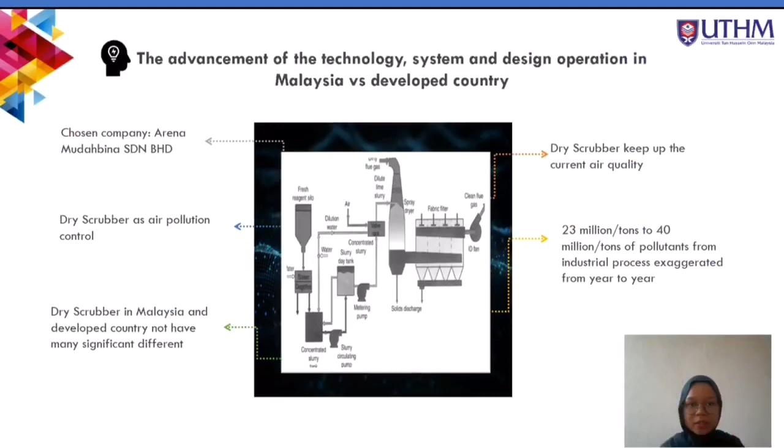A bit about the advancement of the technology system and design operation in Malaysia versus developed countries.

Every country in this world faces pollution from the industrial sector. Malaysia has its own technology and system to manage industrial pollution, like Arena Mudahbina Sdn Bhd, a construction company we contacted to get details about industrial air pollution control. As we know, dry scrubber is a pollution control method used at the construction location for Arena Mudahbina and other companies in this country.

The advancement of the dry technology system and design operation in Malaysia compared with other developed countries such as Belgium does not show many significant differences.

On top of that, the technology and system engineers simply keep up the current air quality that can cut back air pollutants. From year to year, we can see that the emission of pollutants from industrial processes has increased from recording 23 million tons to 40 million tons. Even severe air pollution management is affected.

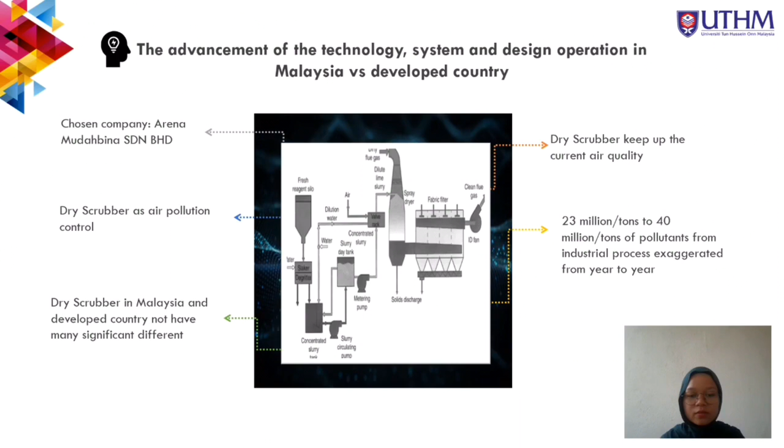So I'm going to proceed with our presentation on the main factors influencing the efficiency of the system. A dry scrubber was used in the companies we interviewed. The efficiency of a dry scrubber system is determined by three general characteristic factors.

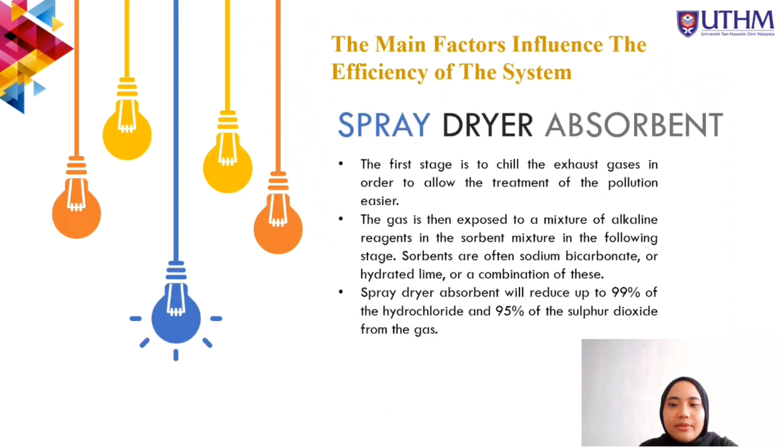The first one is spray dryer absorbent. The first stage is to chill the exhaust gas in order to allow easier treatment of the pollution. Spray dryer absorbent will reduce up to 99% of hydrochloride and 95% of sulfur dioxide.

The second one is fabric filter, which is extremely efficient and does not need any power to operate.

Next one is electrostatic precipitators, which might also effectively remove particulate matter, but it can consume up to 4% of a power facility's supply to generate its electrostatic charge.

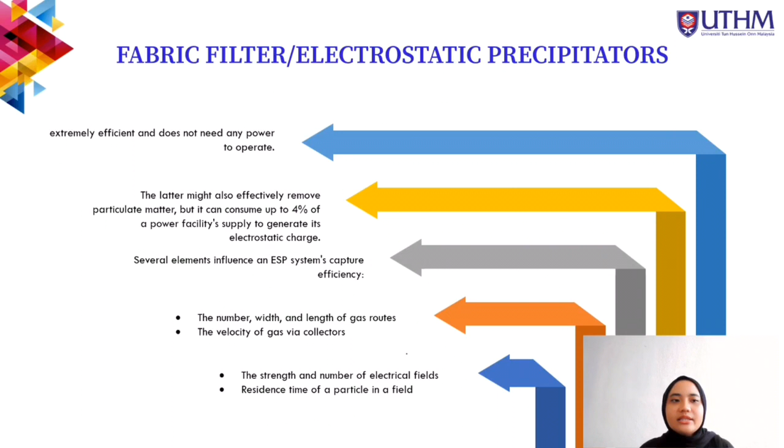The last one is dry sorbent injection. The success of this process is determined by the filtering mechanism used. Dry sorbent injection, when paired with fabric filtering, may filter up to 90% of HCl, which is hydrochloride.

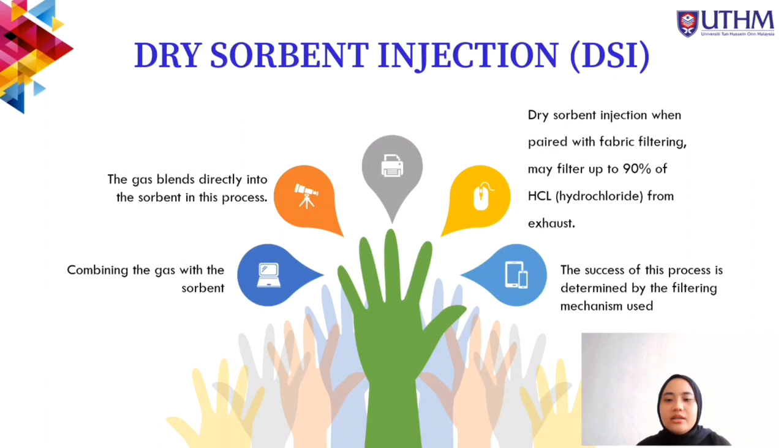I want to present the advantages and disadvantages. Advantages for dry scrubber: first, cost saving - reducing overall load resulting in cost saving. Second, safeguarding the environment, benefiting the economy.

Next, producing dry material for convenience of handling. And finally, it is effective in removing submicron particulates.

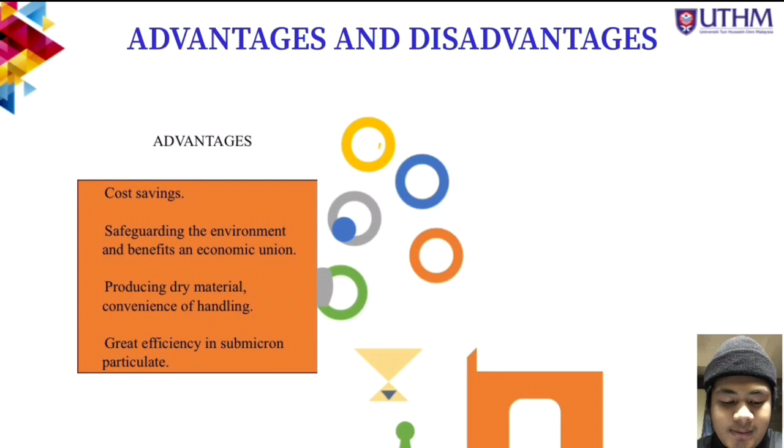For disadvantages: first, environmental impact. Second, release of harmful excess dust residue - discharge must be handled by professionals. Next, high temperature can cause damage to the dry scrubber. Finally, the potential risk of fire must be managed by an expert.

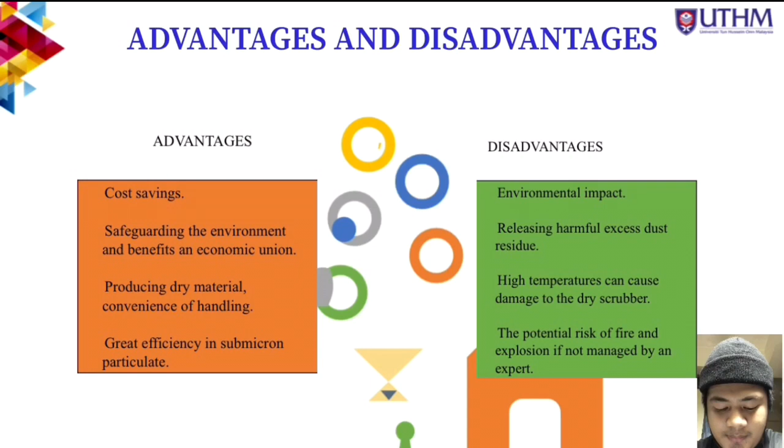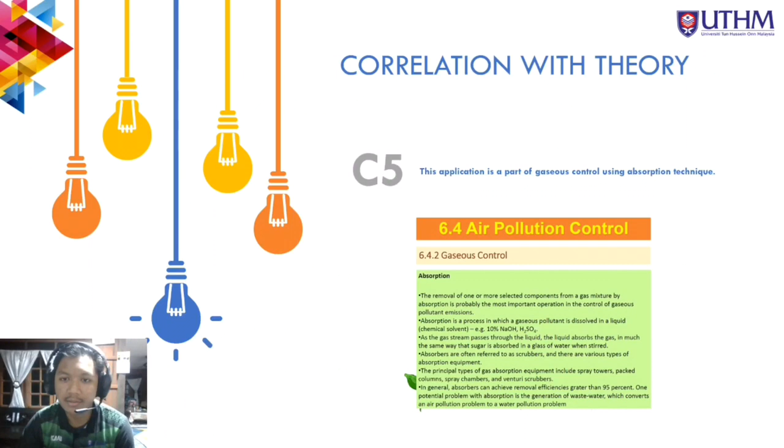This is the correlation with the theory. So our selected interviewed company is using dry scrubber technology, and it is related to the chapter 5 topic.

To improve the dry scrubber system in Malaysia, the first step is to increase the use of gas cooling, reagent injection, and filtering. Emission gases are cooled in the gas cooling system to make it easier to remove pollutants and other contaminants from the gas.

An evaporative cooler is used to dilute the exhaust gas. The reagent injection can commence once the gas has been sufficiently cooled. The hazardous components of the gas are really eliminated during this stage.

The second improvement is using more durable materials to prevent corrosion on the pipe. In construction, pipes in this system should ideally be made of corrosion-resistant material, since the construction is exposed to outdoor weather, which allows the dry scrubber system to rust if non-durable materials are used.

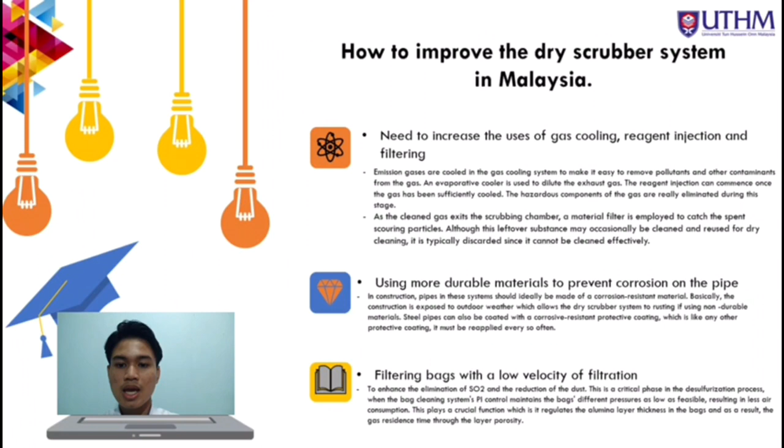Last but not least, filtering bags with a low velocity of filtration. This plays a crucial function, regulating the alumina layer thickness in the bags, and as a result the gas resides through the layer porosity.

The future of the environmental engineer: first, they will be involved in modeling and critical analysis, where they can examine the life cycle of proposed developments, such as chemical plants, to determine what emissions will be produced during the manufacturing process.

Next, they can monitor air quality and guarantee that necessary criteria are met. It is the responsibility of environmental engineers who work for government agencies to monitor air quality and guarantee necessary criteria are met. And finally, they get involved in the design and construction of technology solutions.